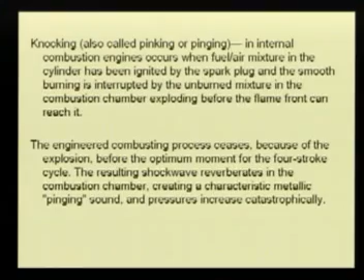The resulting shock wave reverberates back and forth in the combustion chamber, creating a characteristic metallic pinging sound, and pressure increases enormously. As a result, the engine knocks, it doesn't perform well, and you can even hear the sound. That's what's happening, so I want to explain why this happens and how it happens.

See, hypothetically, let's say this is your cylinder, and I can divide this into 3 parts. There are no barriers as such, but just imagine there are. So here is the spark plug.

So the fuel has started burning in this one, because you put this thing. Then as a result this is expanding, so B is under compression, so is C under compression. As this flame comes, B also gets burned.

This thing is already burnt. This also gets burned, it's burning, and by the time the pressure in C becomes enormous, because first this portion burns, then this, and then by the time the flame reaches C, because of the high pressure, the temperature rise, this auto ignites.

So then this was in compression, so this also explodes, and it pushes the explosion backwards, and as a result you have knocking in the engine and you don't get proper power because of this.

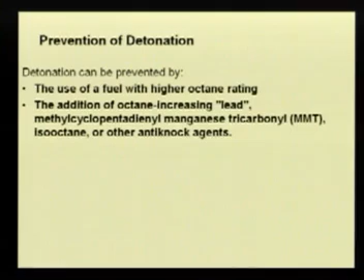In addition, there's the addition of octane-increasing lead. There are other things you can use, called MMT in short form, that is also an anti-knocking agent. But lead is one thing which has been found, in the form I'll show you, to make this explosion delayed, and once the flame is able to reach after the delay, everything is fine. So what does this lead do?

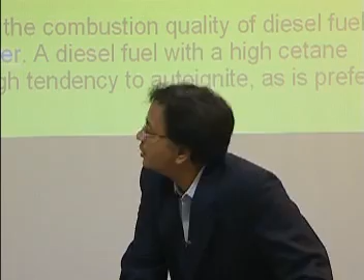We'll not get into so much of the mechanics here, let's define the octane number first, since we have used this word.

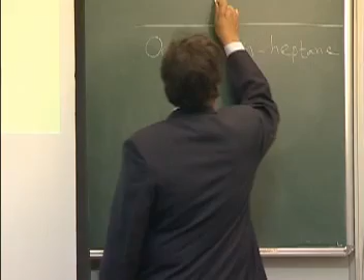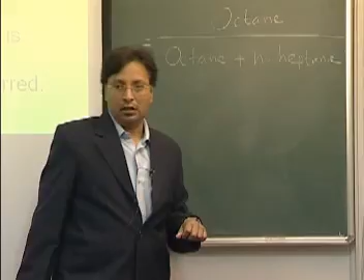Octane number is the ratio of the octane you have in your gasoline, to the octane plus N-heptane. That is the ratio. So this is called the octane number.

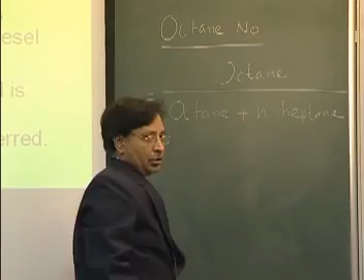This is the ratio. Octane is measured relative to a mixture of isooctane and N-heptane. An 87 octane gasoline, for example, has the same octane rating as a mixture of 87 volume percent isooctane and 13 volume percent N-heptane.

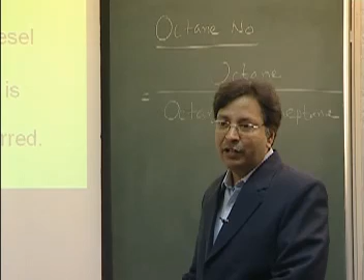The interesting thing is that it may not have any octane, your gasoline may not even have heptane. It is the characteristics of your fuel which matches with what kind of behavior is there, in terms of knocking and anti-knocking performance, because that's the standard used to assess knocking and anti-knocking.

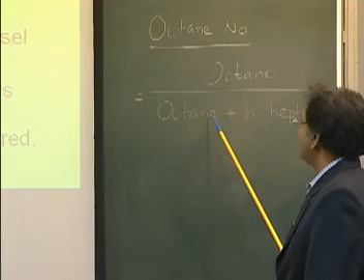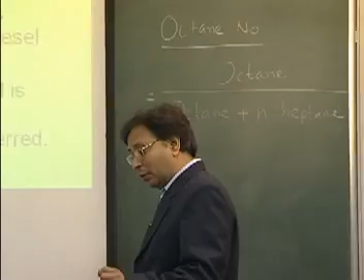So if it is comparing with something similar to this 87%, then this fuel may be called to have an octane number of 87, and yet it may not have any octane or heptane for that matter. Is that clear?

As it reads, this does not mean the gasoline should actually contain these chemicals in these proportions. It is the characteristics of the fuel which is equivalent to having a fuel with octane and heptane in the order of 87 and 13 percent by volume. So this is the characteristic.

Octane number can sometimes be reported higher than 100 also. It is the behavior of the thing, and if you have only octane, you will not find any kind of knocking. That is, you have no N-heptane, then the octane number is 100, and everything is all right. So when we are enhancing the octane number of the gasoline, we are not playing with this directly.

Okay, we are putting something else, and yet we can say, oh, the octane number is changed, as if we are changing this, but we are not changing this.

A high tendency to auto-ignite, or low octane rating, is undesirable in the gasoline engine but desirable in the diesel engine. Why? Because in a diesel engine we want self-ignition to take place, and that number is defined in the diesel engine by the cetane number.

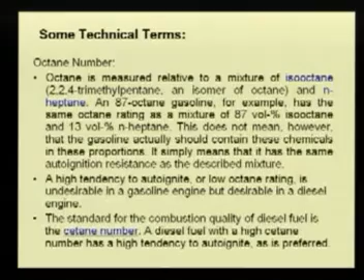We will not get into the details because we are talking more of air pollution. The standard for the combustion quality of diesel fuel is the cetane number, which is close to around 50. A diesel fuel with a high cetane number has a high tendency to auto-ignite, which is preferred in the diesel engine. We want it to auto-ignite.

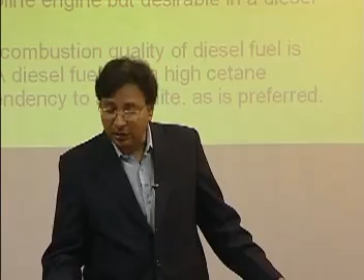So you see the difference between octane number and cetane number. We have given you the meaning, the definition of the octane number, and the real sense of the octane number also.

This is the compound of lead that was used as an anti-knocking agent, and it was mostly by experiments and science that people developed that it improved the anti-knocking capability of gasoline.

So tetraethyl lead, abbreviated as TEL, is an organometallic compound with the formula CH3CH2 repeated four times. It looks something like this.

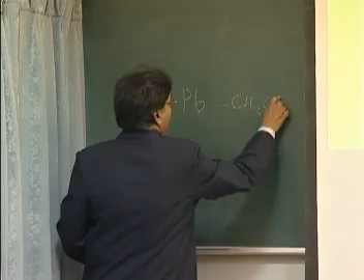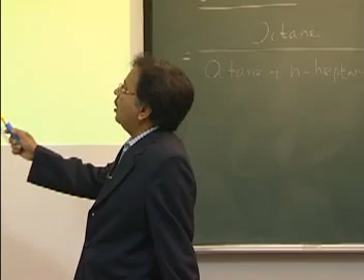So that was a compound that was used, developed through many experiments people had done. And how is this produced? TEL use was largely discontinued because of the toxicity of the lead. It is still used as an additive in aviation fuel known as avgas.

I don't know if it's still true. In my opinion, they should even stop this. But this is all from the literature.

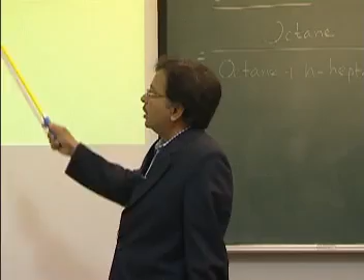And how is it formed? Well, you don't have to know and remember this, but still, to just get an idea as to how this is formed, you are basically using ethyl chloride, reacting it with a sodium-lead alloy. So you make it react with the alloy under certain conditions and you will get the lead compound.

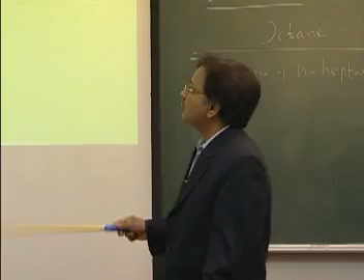And then of course some lead is recovered and things are balanced, I guess. Yes, they are. So you produce this and then you mix it in.

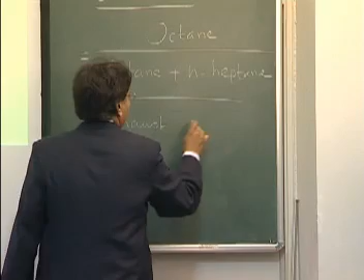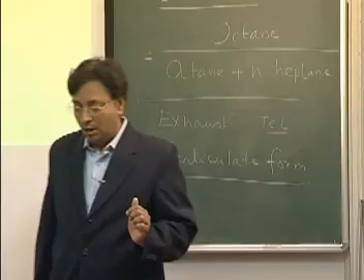Remember that once we put in the lead, the lead will not destroy itself, and in the exhaust you will get the tetraethyl lead, and most of it, about 90%, is in the particulate form when it comes out in the exhaust.

The problem of lead toxicity is, just remember my words, very severe, a very horrible compound. We may have a lot of utility, but the body needs some kind of metals, including mercury, including all things you can think of. But lead is one metal which the body has no use of. We also need some molybdenum, some nickel in the body, but people have found that lead has no use. So lead was a serious problem, and it comes in particulate form.

The other problem which we need to write and specify, we will see a little later. If you recall, in the exhaust you have CO, hydrocarbons, and NOx. One of the ways to control this is to catalytically oxidize them, and so all automobiles now have a catalytic converter, especially the gasoline ones.

So the problem with the catalyst we used, which I'll show you a picture of in a moment, is that lead was a poisoning agent for the catalytic converter. The life of the catalytic converter would reduce if you used lead in gasoline, because it interferes with the catalytic property. So lead was a problem both from the health point of view and the performance of the catalytic converter.

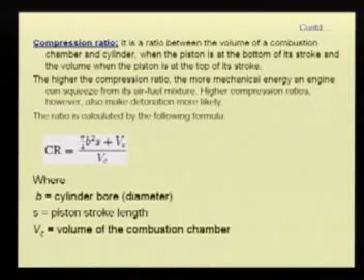This is the volume when the piston is at the bottom. The compression ratio is the ratio between the volume of the combustion chamber and cylinder when the piston is at the bottom of its stroke, and the volume when the piston is at the top of its stroke. So what you can say, if I draw a picture, I guess you will agree with me. If not, then ask me the question.

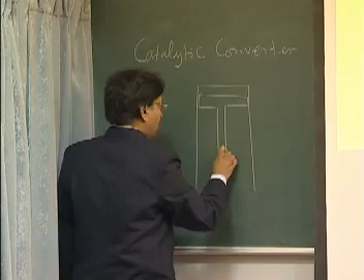Top position, okay, this is your VC, okay, all right, and then...

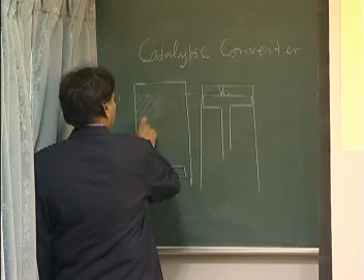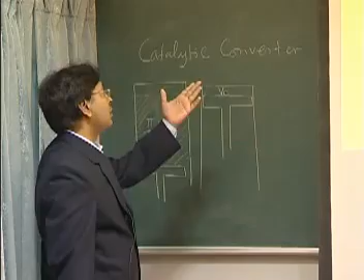This volume, okay, that will be the diameter times, so suppose the diameter is being called here B square. This volume will be pi by 4, diameter is being called as bore diameter B square, S is its length, okay, and then you can see what the ratio is.

Now, as I was telling you yesterday, the other issues with the diesel engine, we are still staying with the diesel engine. The diesel engine problem was the NOx that we have described in great detail, and we will also talk about NOx a little bit in a moment.

But this NOx, okay, apart from the NOx in the diesel engine, you have NOx plus, in fact this is called DPM, diesel particulate matter, okay, that is a very serious problem, okay, that is formed in the diesel engine.

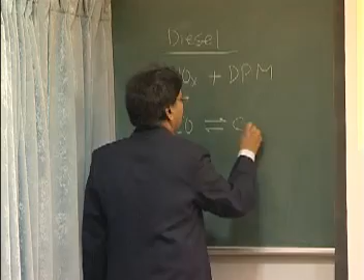Does it? Yes. So this becomes... you are not finding the carbon monoxide at the end because this is burnt out as well. But CO is formed at the initial stage that can lead to the soot. So people try to stop this formation of CO, but that can sometimes instantly form in this kind of way. So this is one of the routes.

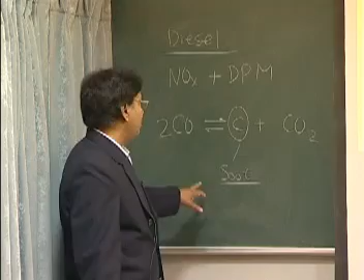The other routes people have talked about, but you can see here this is the oxidation of the carbon monoxide which can result in the soot or the elemental carbon. But apart from that, the particles which you see in the diesel, the general composition looks like this.

Carbon, 41%. There will be some ash and other things. The ash, some ash will still be there in the diesel that cannot be burnt, a very small amount. There will be some metallic components because of the hitting with the metal all the time. So there will be a lot of emissions of the metal.

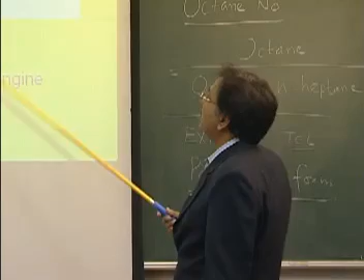Diesel will have some metals, okay, that will come out. The lubricating oil will have some metals. The piston and the piston walls have the metals with this one. So that will come out, and then some amount of the unburnt fuel oil comes out. Unburnt oil, that is the lubricating oil, that can come out. Some of the unburnt fuel can come out, and then you also see a significant amount of water.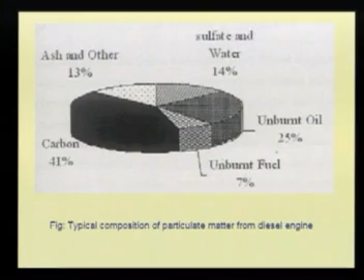More than the water is the sulfate. In this process, people have found in the diesel the sulfur dioxide, since sulfur is there in the diesel. That sulfur somehow forms, not the entire amount, okay, but a significant amount, particulate sulfate. Okay, and let me tell you that we all talk about...

With my experience, I can tell you the sulfur dioxide hasn't been a main problem in the country, but still the sulfur has been reduced to a great extent in the diesel. To start with, we had something like 1%, like in 1999 or 2000, sulfur content was about 1% in the diesel. Okay, what happened after that?

See, SO2 was not a problem in the ambient air. But then the combustion people could show, and they all knew from before and from the literature, that lots of sulfur goes into the formation of sulfate. So in order to control the particulate emissions from the diesel, the sulfur was reduced, not because SO2 was a problem in the atmosphere.

Okay, and then people talk about ultra pure diesel and things like that. Right now, in the country, we have something like 0.25% sulfur in the diesel. I think in Delhi, they have even gone below this. And finally, they are talking about the sulfur content in the diesel being of the order of about 500 ppm.

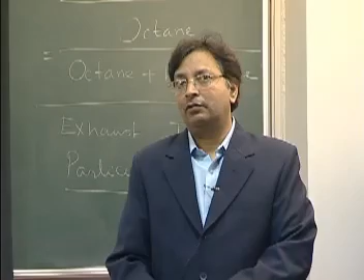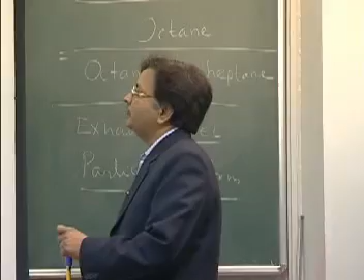0.05%, yes that is correct. So you see, we are talking about a huge reduction, largely because we want to reduce the formation of sulfate particulates, not because SO2 itself is a problem as of now.

This we had seen yesterday, but let's have a quick look at this one. In the exhaust you get nitrogen, water, carbon dioxide, and pollutants - unburnt hydrocarbons, carbon monoxide, oxides of nitrogen, and other elements or compounds. That's what actually happens. And then of course these things get mixed together.

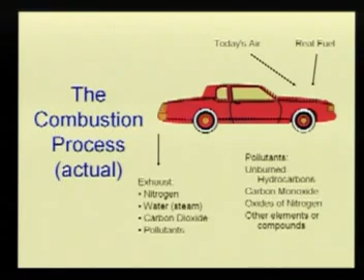And then let's look at the losses that we talked about yesterday - evaporative losses are there from the engine, and blow-by emissions, that's what we had discussed last time. And due to other evaporation, you see that now in research, people are talking about the emissions from the...

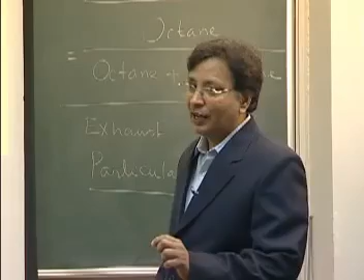Wear of the brake - the problem is that the brake lining, many times you can see the brake lining, it doesn't have a cover, and when the brakes are applied, this lining gets worn out. A lot of metals come out, and apart from that, the brake lining is largely made of asbestos, so asbestos particles also come out, causing emissions from the brake lining.

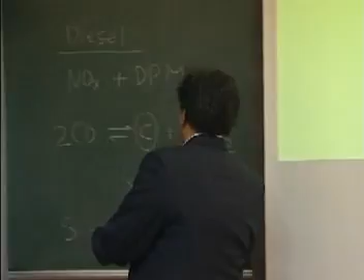The other thing which is non-combustion related but related to automobiles is tire wear. We will not go into too much detail on this one. You have the tire and the road surface.

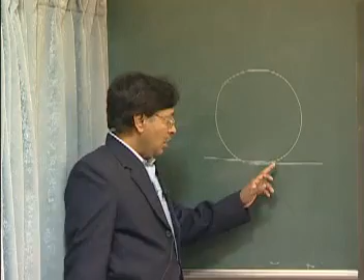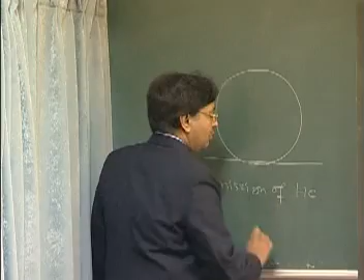The temperature here - one thing is the emission of hydrocarbons, which vaporize because of the temperature, and the other thing is that just because of friction and abrasion there will be particle wear out. This is also very common, you can see the particles, especially when braking, this emission becomes very large.

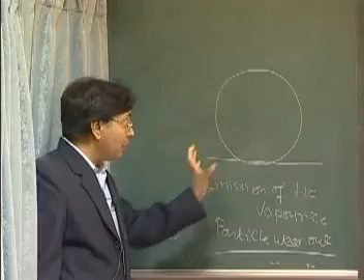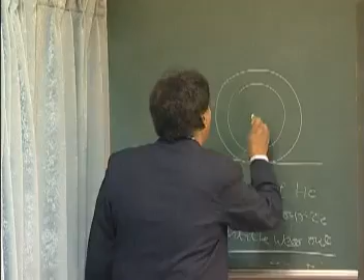We are really talking about significant emissions here. And in addition, all tires have aromatic oil. These aromatic oils, just because of friction, will give rise to emissions of aromatic hydrocarbons, which become another serious problem - these are all cancer-causing compounds.

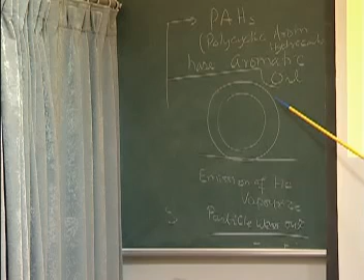Our technology for the engine has advanced so much that we are reducing huge amounts of PAHs. But once PAHs were reduced, people still didn't find reductions around the roadside, and they found out it was largely the wear and tear of the tire giving rise to the PAHs. One of the students is working on estimating the PAH emissions that can come from this.

And don't forget, PAH emissions and hydrocarbon emissions can also occur not only from what's in the tire, but from the bitumen itself - bitumen is organic stuff. The wearing out of the bitumen can also give rise to emissions which people were not considering earlier, but now people are becoming serious about it.

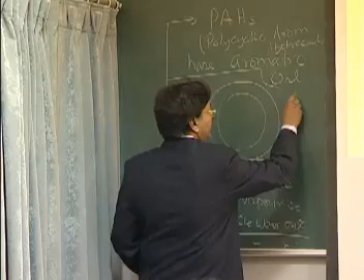Apart from that, we should not forget the metals, which may be part of the tire, or on the bitumen, or if it's a cement road - the cement may have some of this too, especially where people are using fly ash. It's a matter of investigation - I'm not saying metals come out so easily from fly ash, but it's possible. One of the masters students here is looking at metal emissions from non-exhaust sources related to vehicles and roads.

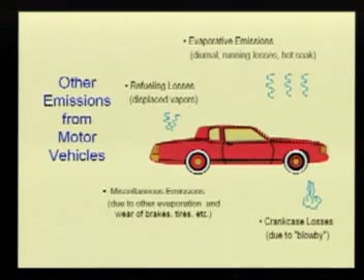So these are little things I thought I'd mention because of the tire. We talked about blow-by emissions - this is the running losses, crankcase losses, exhaust emissions, evaporative emissions, and refueling losses. I want to talk about these evaporative losses, that's what we were trying to discuss last time.

So about the hydrocarbon emissions from the fuel tank. As you are filling this thing, there will always be a vapor pressure that will be there. It has to be there. So this fuel tank vent line, this is not the fuel supply. Don't misunderstand that - it is taken depending on the pressure. So there's a little pump that will suck these fumes, and there's a charcoal adsorbent which will absorb the fuel in here.

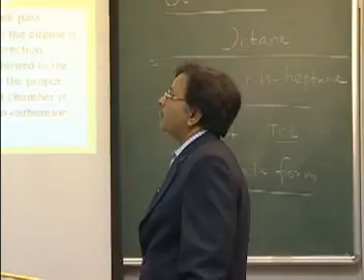But then you can also have vaporization in the carburetor reservoir. That emission can also be sent to this absorbing canister. As the vehicle is moving, you reverse the direction of flow, and you try to regenerate from the air - you can drive out these emissions and put it back in the engine. Air with desorbed hydrocarbon enters the carburetor below the throttle plate when the engine is running, so this can be utilized. Otherwise these emissions could be out of 15% or something.

So all cars, on all engines, they will have this facility. Let me write down from the book what is written here: Control of evaporative emission - the hydrocarbon containing vapors from the carburetor and the fuel tank pass through the charcoal canister. Your car has a canister now, and it removes the hydrocarbon before those vapors are vented to the air.

When the engine is running at other than idle or very low speeds, air is sucked through the canister in the reverse direction, removing the hydrocarbon from the charcoal, preparing it for its next service. The regenerated air is returned to the air entry in the engine where the hydrocarbon it contains is burned. Suitable valves maintain the flow in the proper direction. The canister has low enough flow resistance that the pressure in the carburetor float chamber is close enough to atmosphere for the proper operation of the carburetor.

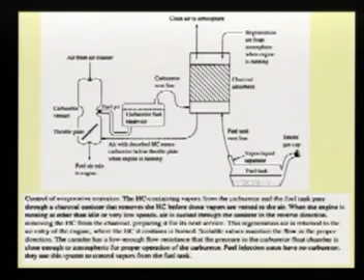Fuel injection autos have no carburetor. They use the system to control vapor from the fuel tank. The fuel injection automobiles have no carburetor - they use the same system to control the vapor from the fuel, if you have the fuel injection system where you have no carburetor.

Now we're talking about the NOx. We talked a great deal about NOx emission, but one of the few ways in which you control the NOx - one of the methods which has been talked about and to some extent used also - is exhaust gas recirculation.

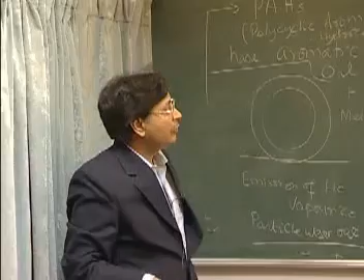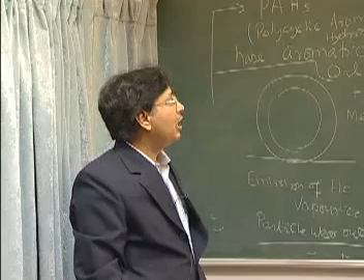People have found the NOx reduction occurs because one thing is the oxygen content is reduced, and the second thing is that this gas can absorb some of the temperature, and since this is not going to burn, it's more there to absorb the heat. Once heat is absorbed, you still get the power - some reduction in power, yes, but the NOx control takes place because of both the drop in temperature and reducing the availability of oxygen in the process, and this works.

But the problem here is, if you don't remove the particles, the diesel particulate matter (DPM) can also be recirculated, and these particles cause a lot of wear and tear of the engine because they get between the two metallic surfaces. As a result, the wear and tear of the engine is a bit more. People also found that because of this, the emission of particulates increases, so people have to make a trade-off between controlling NOx or letting particulate pollution go up.

This is what people found, showing temperature versus load. This is the reduction in temperature. Without EGR, the exhaust temperature was high. With EGR, the temperature is lower even at different loads of the engine.

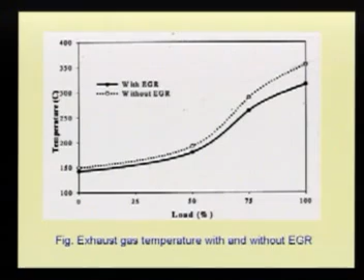This shows that the NOx emission will reduce, and indeed it does reduce. But what people have found is that with this technique, soot density increases, obviously because you are recycling the soot also in the process. This increased soot density causes some problems in the wear and tear of the engine.

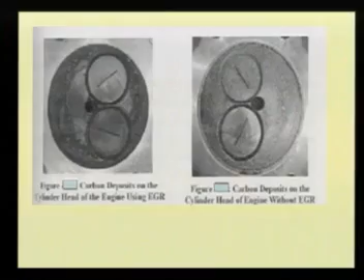People have also found carbon deposits on the cylinder head of an engine using EGR are much more compared to the same kind of engine without using EGR. So that is again a trade-off. But whatever ways you can find to reduce the temperature will reduce your NOx emission.

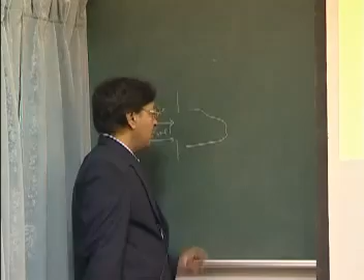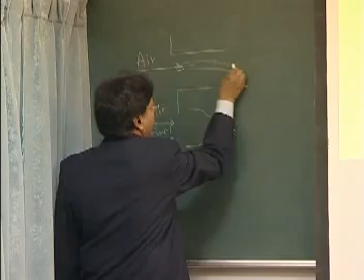One of the ways: you have air and fuel going into the combustion chamber, and there will be a flame. Don't supply enough air there—supply deficient air so you don't have enough oxygen to react with nitrogen. Then have a baffle and supply secondary air from there, which can reach this flame. This is a kind of second combustion, because the whole thing will not burn at once.

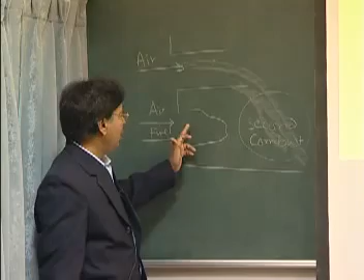The temperature won't be very high, and as a result you get low NOx. But in the process, the size of the engine—or in the case of a boiler, the size of the boiler—increases. In a boiler you can certainly do this, it will just be slightly bigger, but in engines it becomes difficult to supply this.

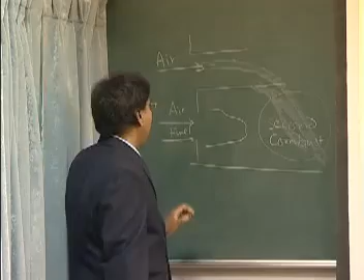But there are other ways to handle it. Sometimes people also supply steam or water—water jets are put in. It sounds funny, but while combustion is happening, you're also supplying steam. What water does is absorb a lot of heat without a large rise in temperature—that's a specialty of water. So it absorbs heat and the temperature rise is not so much. We have some water anyway in the exhaust, so some more water going in isn't a problem, and this helps reduce NOx formation.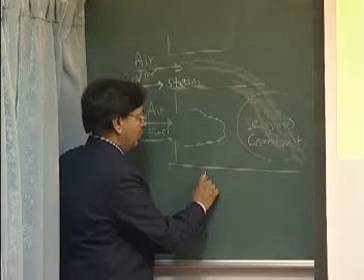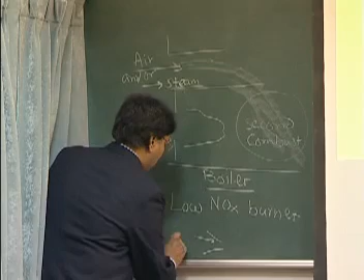We also have a special kind of burner called the low NOx burner, which can be used in a boiler or similar setup. In that case, you have air and fuel, and then another stream provides a bit more air from the other side, and the temperature is dropped as you burn it.

You should remember, the amount of heat is the same—heat is not changed, it is only the temperature that we are playing with. So you can still do almost everything you want, but you are simply reducing the temperature, because high flame temperature favors the formation of NO, or NOx.

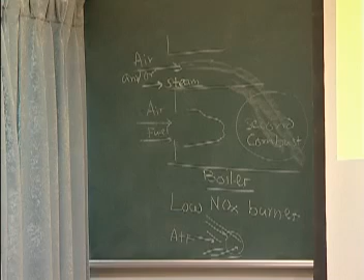Air pump adds combustion air to tailpipe. Now let's talk briefly about the catalyst. First, the two-way catalyst, for CO and volatile organic compounds or hydrocarbon vapors. That's called the two-way catalytic converter. Catalyst design and active metal content matter, and many metals are used as catalysts in this one.

The three-way catalyst is the one which can handle not only CO and VOC but also NOx. So in this one, what we want is oxidation to carbon dioxide and water, and reduction of NOx back to N2 and O2. We'll see the details.

Catalyst design and active metal content, and location of the catalyst near the engine, which I'll show in the picture. This heats the catalyst faster to provide emission control sooner, because all the reactions happen quickly at high temperature. It can capture pollutants during the first few minutes of vehicle operation, until the catalyst is hot.

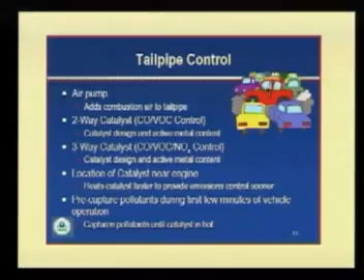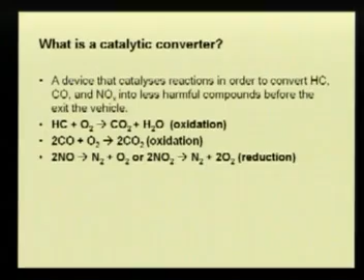Now let's show how it works. Basically, excess oxygen is supplied, or oxygen can be supplied especially for the catalyst without needing the engine. HC and oxygen undergo oxidation to form CO2 and water, and NO is reduced to N2 and O2, or if there is NO2, that can also be reduced. When we talk about control equipment later in the course, you'll see how NO is reduced to N2 and O2.

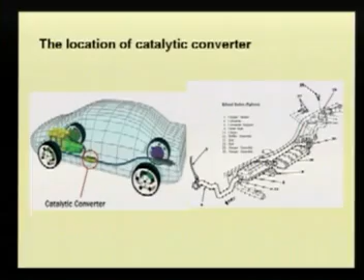There are some patents on these designs, but this is basically the catalytic converter. You can put it here, in the exhaust system. So this is where it goes, but it depends on different engines where they like to put it in the car. That more or less describes the engine.

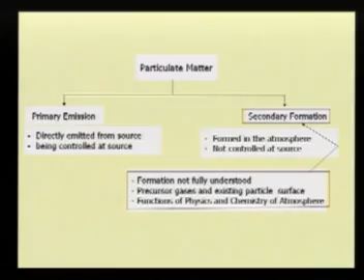I want to cover something we maybe should have done in the atmospheric chemistry part, but it's not so much in the books. Let's take a look. We're looking not only at organics and ozone, but also at the secondary formation of particles, which are not controlled at source. Their formation is not fully understood, although gases play a role in producing sulfate and nitrate particulates. This depends on the physics and chemistry of the atmosphere. I'll give you some reactions.

As I write on the board: ammonia undergoes a reversible reaction to form ammonium nitrate, and you can also get ammonium sulfate, because SO2 becomes H2SO4, which reacts with ammonia to form ammonium sulfate. Similarly, you can get HNO3, which reacts with NH3 to form the fine mode of ammonium nitrate.

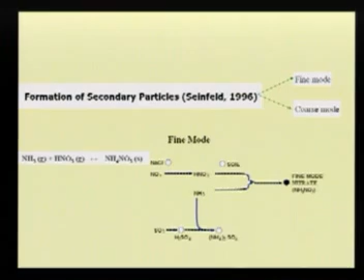This will be very much in the fine mode. The formation of secondary particles is shown here, but they can also form in the coarse mode—if you have soil, HNO3 can react with it, and soil particles are always much larger. These particles are formed because of chemistry, but soil particles are larger, so soil can also neutralize HNO3. Suppose you have calcium in the soil, you can form calcium nitrate, but that will be in the coarse mode, the larger particles. Otherwise, if reacting with ammonia, it will be in the finer mode.

Similarly for the coarse mode secondary particle, you have HNO3 and soil particles, which can react to form the coarse mode of nitrate, because HNO3 can also react with soil—here's the tentative reaction. When there's a little moisture in the atmosphere, calcium of soil origin can react with HNO3 to produce calcium nitrate.

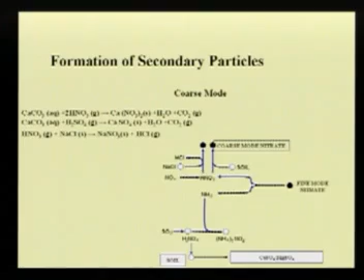H2SO4 can produce calcium sulfate, and similarly NaCl. Since these particles are large because of the soil, they end up in the coarse mode. So you have to determine with the chemistry whether this will be in the coarse mode or the fine mode, depending on what atmospheric conditions you are dealing with.

Also, if you really want to model the way we model ozone and things like that, suppose we are trying to model the fine mode. All this will be in the solid form, or it could be in the liquid form also.

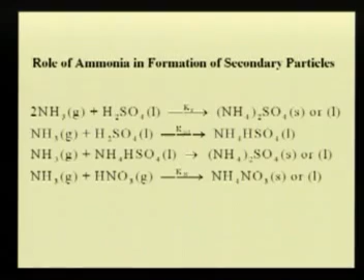So ammonia with H2SO4 can make ammonium bisulfate. It can again convert to ammonium sulfate, and it can form ammonium nitrate.

What we really need to see are these rate constants. We have to very carefully write the equations, and then solve them for what you have: the source of ammonia, the sulfur dioxide, the power plant. We'll be able to say that although there was no emission from the power plant in terms of particles—because you are cleaning everything, the stacks look clean—still downstream you can find a lot of particles. We strongly believe this is a major source of particulate contribution.

Investigations are still going on. Once we study these Ks, Ks1 and Kn, for ammonium nitrate and ammonium sulfate, and how they are formed and what their concentration and quantity are, we will be able to understand this.

I can also tell you one thing very quickly: this is very volatile. So if you don't measure and capture it properly, it will not even be captured on the filter paper if your temperature is high.

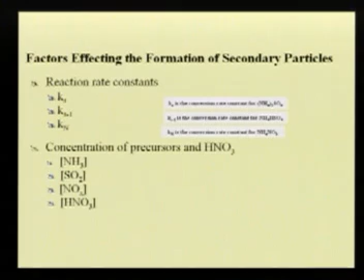So these are the rate constants that we have seen. I'll pass on these slides to you. The concentration of precursor gases depends on ammonia, SO2, and NOx. So you should model the formation of HNO3, and then the formation of sulfates and nitrates with this.

Let me show you—try these out. Otherwise, I'll try to send you this reference as well. If I don't, just let me know that I have not sent this one.

Using the same concept we learned about pseudo steady state, you can write the equations for both ammonia and HNO3 under different conditions, whether this is the route or that is the route, and then estimate the rate constants. It has been found that this K depends not only on temperature but also on humidity, because humidity plays a significant role.

It also depends on the amount of energy in terms of watts per meter square that we are getting, and it depends on temperature. Once we understand these things, we can model the plume as it travels—at what distance you will form ammonium sulfate and ammonium nitrate, and you will find the impact.

I'll send you this. If I don't, please remind me, because you need to try to understand everything—we have covered the theory as to how we write these equations, since eventually we want to predict the concentration of ammonia, ammonium sulfate, and ammonium nitrate. This should be the last slide, I guess.

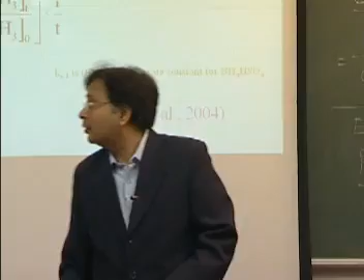We'll discuss that, or maybe if time permits, in the next class I'll show you some calculations that have been done to show that yes, ammonium sulfate will be formed, ammonium nitrates will be formed. We'll stop there, but don't forget that from the atmospheric route we can get a significant amount of particulate matter because of the precursor gases emitted at the source.

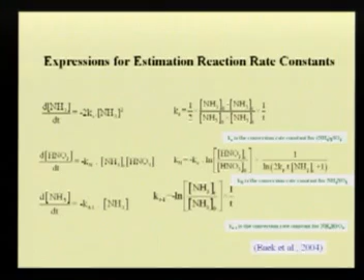Although we're controlling particulate matter at the source, we also need to control the gases if we really want to improve our air quality in terms of dust, because our conditions are very dusty, and this particular contribution can be very significant. We'll stop there.